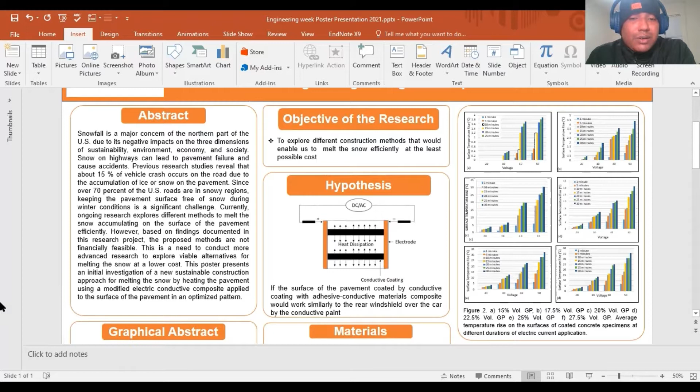snow on the pavement. Currently, ongoing research explores different methods to melt the snow accumulating on the surface of the pavement efficiently. However, based on findings documented in these research projects, the proposed methods are not financially feasible. This poster presents an initial investigation of a new sustainable construction approach for melting the snow by heating the pavement using modified conductive composite applied to the surface of the pavement in an optimized pattern.

Transportation system is continuously developing, which helps the rapid growth of urbanization. So transportation safety is the main issue of people. That does not only depend on the passenger, driver, vehicles, characteristics of the highways, but also overall climatic condition. Moisture, ice, and snow on the pavement are critical factors of natural climatic condition, which lead to brake failure and cause accidents. Moreover, it leads to substantial economic damages, fatalities, injuries, latent safety on the road, and roadway capability.

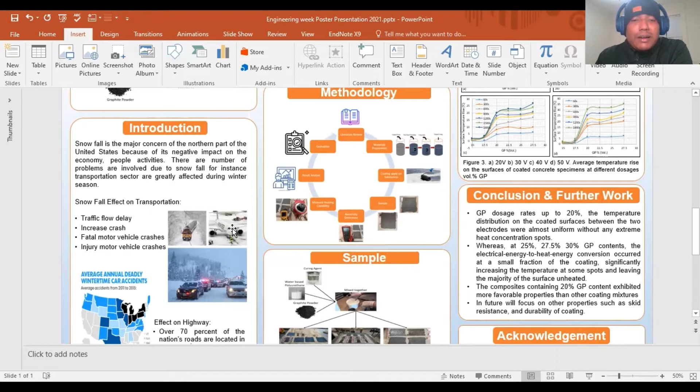The main three sectors of transportation, air, rail, highway, are also affected by the snowfall. For instance, the flight will delay at the airport, train cannot leave the station timely, motor vehicles are hindered of movement on the highway. There is currently ongoing research to explore different methods to melt the snow efficiently. Although some of the findings are promising, most of the methods are not feasible financially.

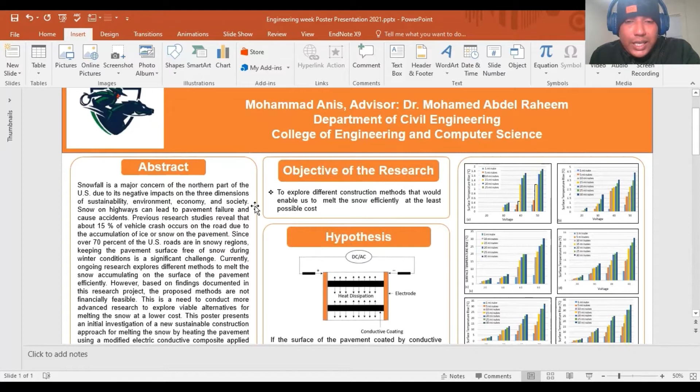The objective of research is that currently ongoing research claims that it can efficiently melt snow from the pavement. However, they are not financially feasible because previous projects and research have revealed that all methods are pricey and economically not viable. So it's essential to conduct research where we can find alternatives or modify the application of methods in order to satisfy a financially feasible and effective solution for melting snow.

The hypothesis is that if the surface of the pavement is coated by conductive coating with conductive composite material, it would work similarly to the rear windshield of the car, a conductive paint. According to the principle of Joule heating, while current passes through the resistor it can be heated up. Therefore, using coating composite as a resistor to control the desired resistivity can generate the required amount of heat to the top of the pavement surface, enabling melting ice and snow from the pavement.

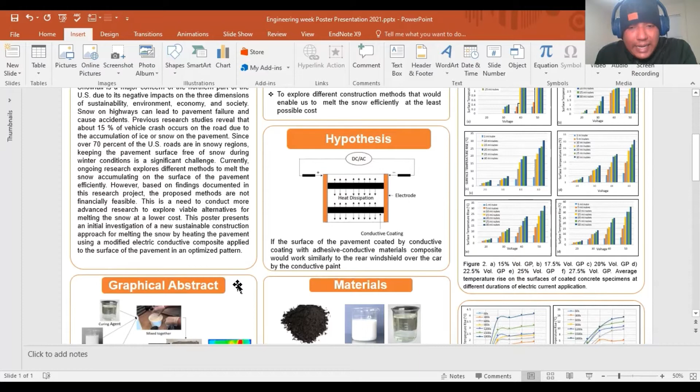In our project, we used graphite powder as a conductive filler with carbon content 99.35%, and water-based polyurethane used as a polymer content, which is fully cured in 5 to 7 days and set to touch in 6 to 8 hours. The composite mixed with GP and water-based polyurethane is supposed to be used on the Portland cement concrete pavement, hence intended for reducing curing time, which will enable shortening the closing time for traffic on the coated surface.

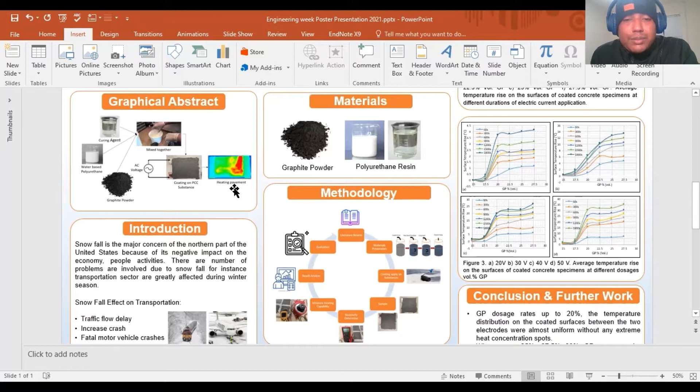Therefore, instead of incorporating any solvents, this study involved using fast-drying water-based polyurethane, which eliminates the duration of required evaporation of solvent to set the composite. This research goal is to investigate the viability of using water-based polyurethane and graphite powder composite as an electric conductive coating for constructing heating pavement.

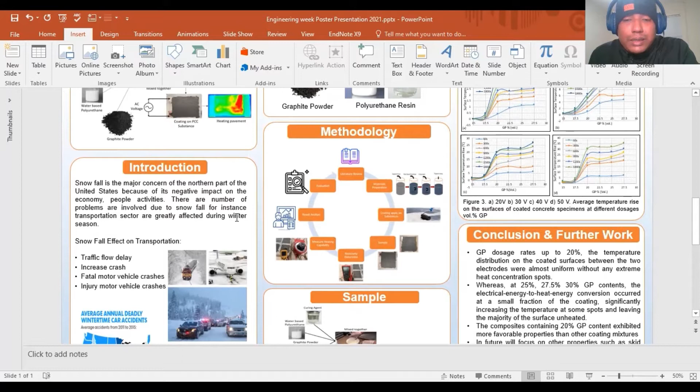The synthesized composite is applied on the top surface of the Portland cement concrete pavement. The optimum amount of GP dose is determined by using percolation threshold theory to achieve the desirable resistive property of electric conductive coating. The heating capacity of conductive coating is measured with an infrared thermometer by maintaining controlling parameters.

The received graphite powder was gently mixed with water-based polyurethane for 3 minutes at 250 rpm at room temperature. The composite was applied to the specimen surface using a brush once prepared following the procedure. Using the required mixture proportion, 2 types of coated specimens on wood and PCC substrate were prepared for measuring electric conductivity, as shown in figure 1.

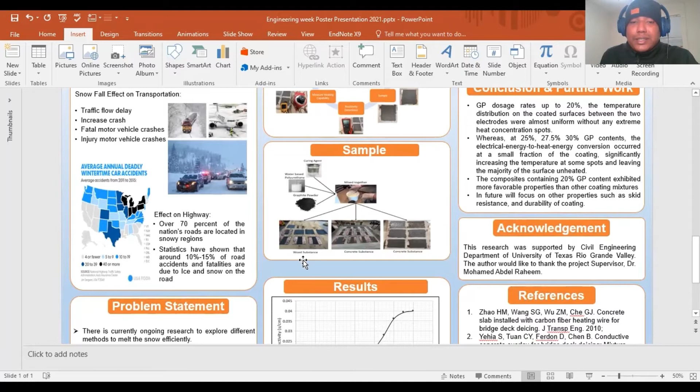Wood substrate was used because the electric conductivity of dry wood is low enough to ensure there was no interference with conductivity measurement. Air-dried Portland cement concrete substrate was used to simulate the real condition in the intended application of this coating material on PCC pavement. Since the results of the measurement on the two groups of specimens were comparable, the final electrical conductivity was taken as the average of the measurement results on both substrates.

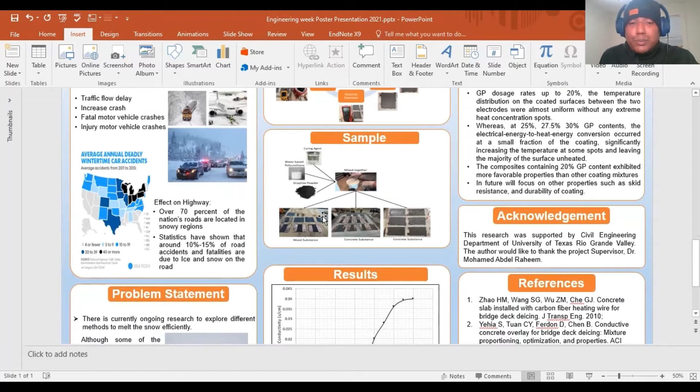The copper tape was applied to the two ends of the specimen to be used as electrodes in measurement of resistance. The two-probe method is a reliable and accurate approach for resistance measurement we utilized in the study. To determine the optimum amount of graphite doses in the polymer content along with achieving desired conductivity of the composite, we used a tool called the percolation threshold, which is an excellent method to explain the electrical behavior of the composite.

The polymer content in the matrix works as an insulator. To reach higher conductivity of the composite, conductive filler should be introduced in the composite after percolation. Therefore, to create the continuous formation of conductive paths in the whole matrix, the volume fraction of conductive filler should be greater or equal to the percolation threshold. As seen in figure 1, the selected range of GP content resulted in fully capturing the percolative behavior, such that the dual critical percolation threshold was found.

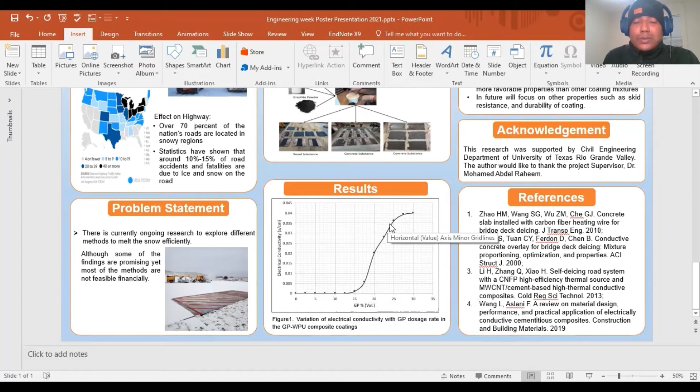As in the figure, different zones can be distinguished in the conductive GP doses. These include two abrupt increase zones and two flatter zones. The first one is observed in 12.5% to 17.5%, and the second one is 17.5% to 25%. In the first zone the composite turns from insulator to semiconductor, and in the second one it is converted from semiconductor to conductor composite.

We evaluated the performance of the composite coating on concrete substrate in terms of heating. Concrete specimens were coated with composite at different GP dosage rates, which were selected based on the result of the percolation threshold determination test. The GP dosage rates were selected such that the whole range of the percolation transition zone and its vicinity were covered. The composite coatings used included 15% to 30% graphite by total volume of composite.

Heat generation efficiency of composite coating specimens was characterized using an infrared thermometer, and AC voltage of 20 volts to 50 volts at a frequency of 60 Hz was applied to each specimen through the copper tape for a duration of 30 minutes. The surface temperature of each specimen was measured and recorded as explained.

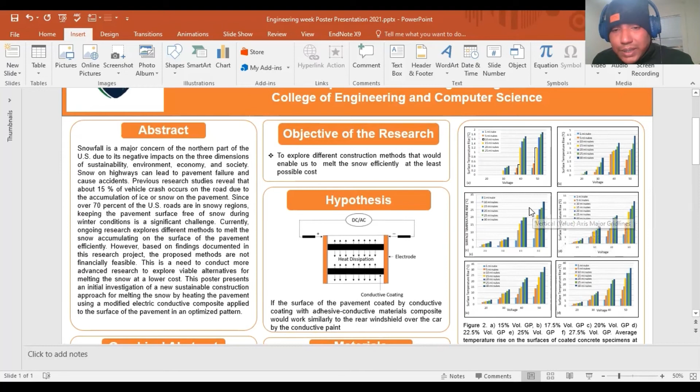Figure 2 shows the heating capacity of PU GP coating on concrete substrate after 30 minutes of current application. Up to 20% graphite doses, the average surface temperature at the end of the electrical heating test increased with the GP volume fraction. Above 20% GP dosage rate, that trend was reversed, resulting in a reduction of heat generation capability. The quality of the coating with respect to surface application and heat uniformity also affects the ability of heat generation.

Figure 3 shows a continuous increase of average surface temperature rise with GP dosage rates up to 20%. The temperature distribution on the coated surface between the two electrodes was almost uniform without any extreme heat concentration spots. The heat concentration can be attributed to high variation of electrical resistivity between different zones of the coating layer due to poor GP dispersion. At high rates of GP content, the composite is more susceptible to filler agglomeration. However, this is hard to capture in small specimens like those used.

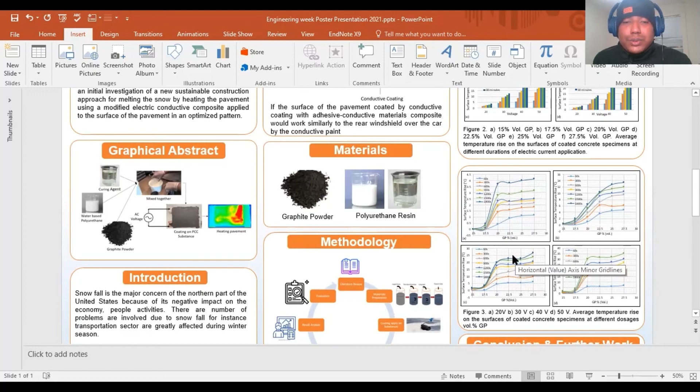The coating composites containing 20% and 22.5% conductive filler provided desirable performance with regards to both the magnitude of average temperature increase and the temperature distribution uniformity. For GP dosage rates up to 20%, the temperature distribution on the coated surface between two electrodes was almost uniform without any extreme heat concentration spots. Whereas at 25% to 30% graphite content, the electrical energy to heat energy conversion occurred at a small fraction of the coating, significantly increasing the temperature at some spots and leaving the majority of the surface unheated.

The composite coating with 20% graphite content exhibited more favorable properties than other coating mixtures. In future, we will focus on other properties of the coating such as skid resistance and durability.